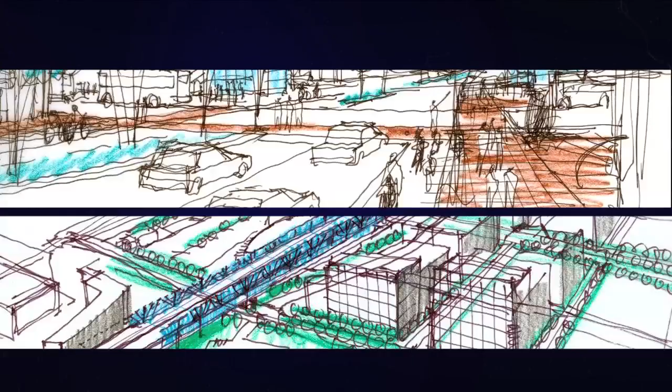I would be anxious too. I would not want what's currently being proposed in my city. One of the things I see in the current design is a singular solution. It says all we're accommodating as far as rubber tire traffic is concerned, all we're accommodating is people in a freeway mentality, a freeway philosophy.

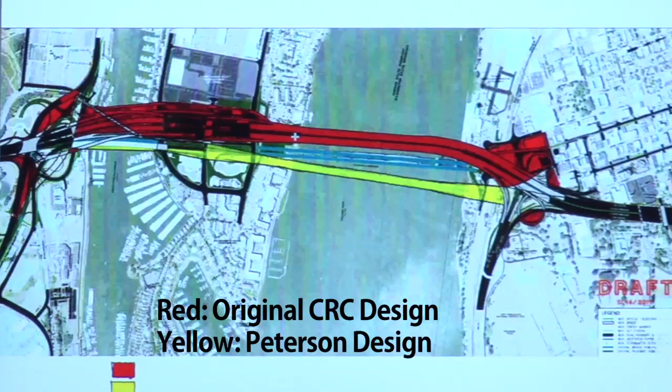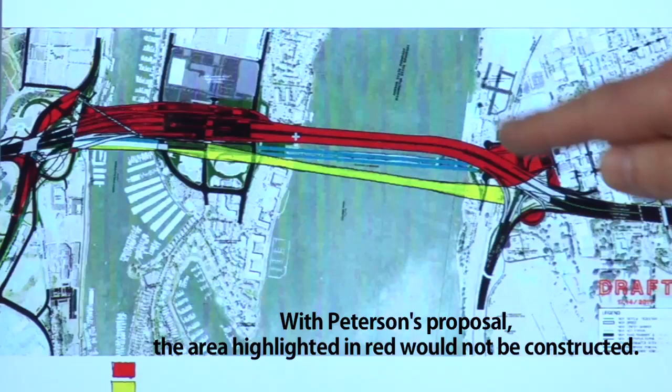So what we have here in the red is the original design, as proposed last winter, I believe. So it's essentially the same. Close to the original design. And then you see in contrast to that, a straight alignment. That's the yellow, which is, in my estimation, a viable alternative for what this crossing could look like. Now, it does a number of things. It brings what is the equivalent of 20 city blocks back into urban use.

It straightens the freeway. Now, everybody who lives in the community knows that there's that very awkward jog as you drop down from the hill, Fort Vancouver, and get onto I-5. Well, with the freeway further downstream, the jog will be a gentle, sweeping, large S-turn. So when we have geometry that is not simple, in a complex environment of off-ramps and on-ramps, you create congestion, and the consequence of congestion is a less safe bridge. So I know that if you straighten the alignment, you gain a lot of safety, and I would think fewer fatalities over the life of the bridge.

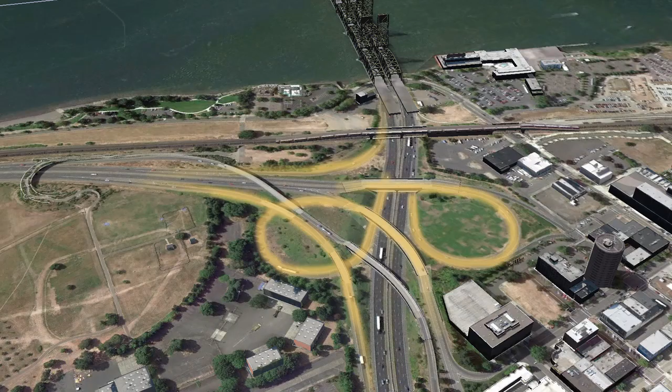One of the fundamental choices you have when putting freeways into urban environments is the collector-distributor. The straight line bridge that you're proposing has two levels. And you have traffic going north on one level and south on the other level? No, what we have is an upper level that's dedicated to interstate movement. Okay, that's your high-speed traffic in the upper level. Right, and that's for people going between, say, Portland and Seattle. That's the traffic that uses the interstate for regional movements. That traffic doesn't want to commingle with the shore-to-shore traffic, which is more of a bypass.

Right. Now, the present design deals with that by having those multiple lanes on the shoulders. So if we take those multiple lanes and just bring them underneath and keep them separate, then the through traffic basically moves through without any conflict. There are people that would love to have light rail on this bridge. Does it accommodate light rail? Absolutely. Does it accommodate pedestrians, bikes? Where do you put that? The arterial level, where traffic is moving slower, where the shoulders can be wide, where people can be seen.

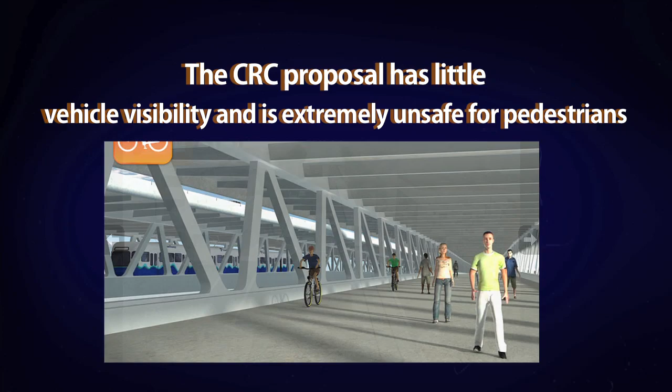Let's look at the individual communities and the choices that they have before them. All right. David, we're looking at a comparison between the existing proposal, its impacts on Hayden Island, and what would result if we were to consider a straight alignment. So what is this red? Those are city blocks. The smaller ones are 200-foot city blocks, so imagine downtown Portland. The existing freeway basically occupies a footprint that is about this expansive through Hayden Island. And it creates a noise footprint that basically envelops the majority of the developmental land on Hayden Island.

What I ask myself is how could we leverage this freeway investment to make Hayden Island a place where 3, 4, 5, 6, 10,000 people might want to live in a transit-oriented development that would be able to take advantage of the light rail station and create a wonderful place that is yet another pearl on the string that forms the necklace of I-5, rather than consume it with this huge freeway. Right. Well, from my point of view, it takes Hayden Island off the map relative to a viable urban place for people to live and work.

How can you have a transit-oriented development where people live and work if they don't like living there because of the freeway noise? It's not going to work. So if you're going to invest in a station, in my opinion, it makes sense to commingle both the rubber tire and the steel wheel in a way that the station can actually serve a residential community that can be proud of where they want to live.

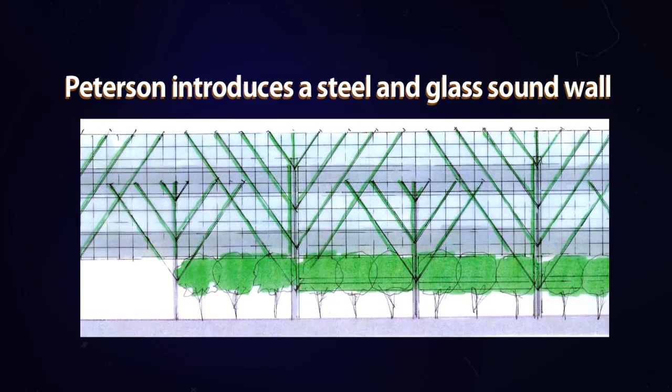It shows a contemporary sensitivity to how to place and contain the noise of a freeway within an urban setting. In fact, if this was done on Hayden Island, this would be a showplace for the world of how to contain the objectionable noise of a freeway.

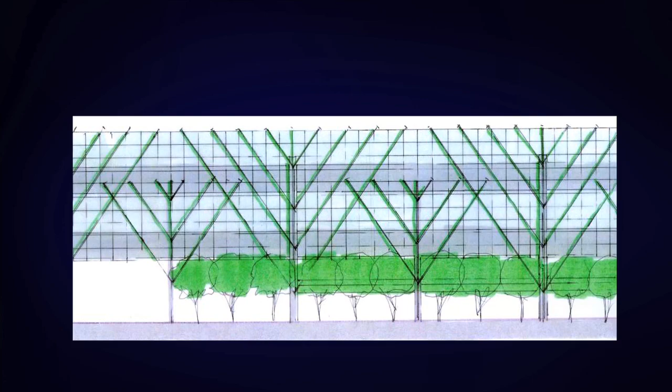I think Vancouver should have a street-level connection between the waterfront and Fort Vancouver. In what's currently being proposed, you cannot do that. The current proposal divides the city. Right, much as it occurs now. Okay, so I wanted a solution that reconnected Fort Vancouver with Lower Vancouver and made a more continuous connection of the waterfront for urban enjoyment and brought the downtown of the city into the waterfront experience.

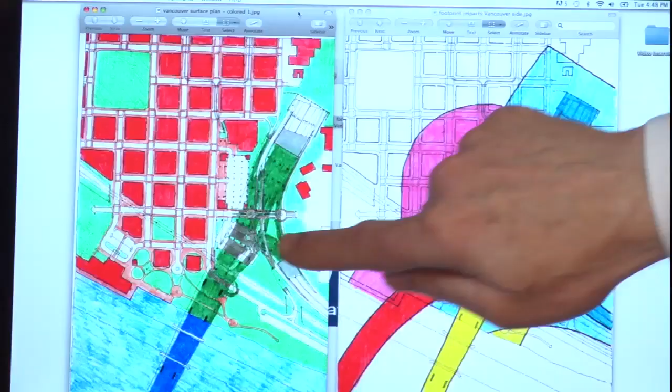It connects the tourist portion of the fort with downtown Vancouver with a city street that does go through this forest of columns that supports the freeway. But I would think that that would be a wonderful opportunity for an artist and engineer to collaborate to really suggest something like maybe old growth trees that connect the fort with what is the river and the trading town,

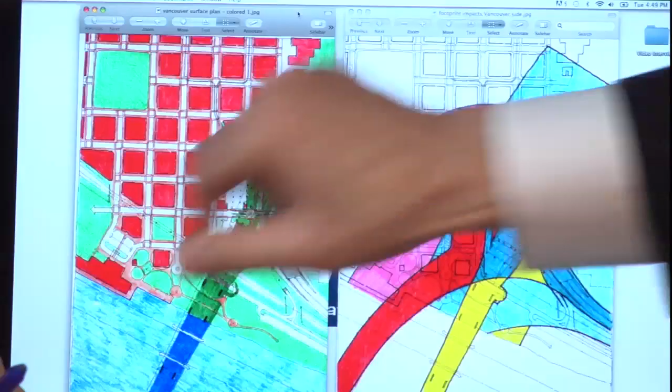and it creates a wonderfully rich pedestrian environment in which a visitor from Portland could take light rail over to Vancouver on a weekend, get off the train, 3 blocks, and you're enjoying the cultural resource that is Fort Vancouver. So what I saw missing from this project was really that broader civic vision for how we can control this infrastructure to make it actually contribute to the betterment of our communities.

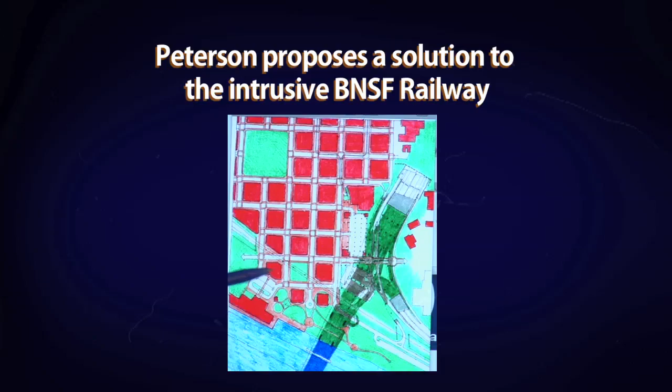So if you look at a strategy for containing and controlling your infrastructure, you can bring back a way of life, which if you look at the historic pictures of Vancouver, people are crying out to re-experience. We're not designing the bridge to meet the needs 30 years in the future. We're designing a bridge to meet the physical realities of a sustainable bridge that must be valid 200 years from now. So once we build this, it's going to be around for a couple of centuries, and we want to make sure we're not too nearsighted.

You create a transportation platform that future generations can manipulate so that they can take advantage of whatever transit opportunities they are presented with. This is something that I think the community could get behind. This is something that I could get behind. When did you first present this alternative to the CRC? Oh, a little over a year ago. And since then, they've thrown out their current design and started with something new. Why wouldn't they consider this design?

Well, we do things in this country in a rather odd way. We are process-driven. We put our decision-making into a series of steps. Once you've passed that step, it's very, very difficult to retreat and create a different direction to a project. Well, we're so far down the road. What can we do at this point? Well, you haven't poured any concrete. True. You haven't expended a lot of money on design. Within this notional approach, you have the ability to save tremendous urban impacts, environmental impacts, a half, maybe 3/4, maybe even $1 billion in the initial outlay to build this.